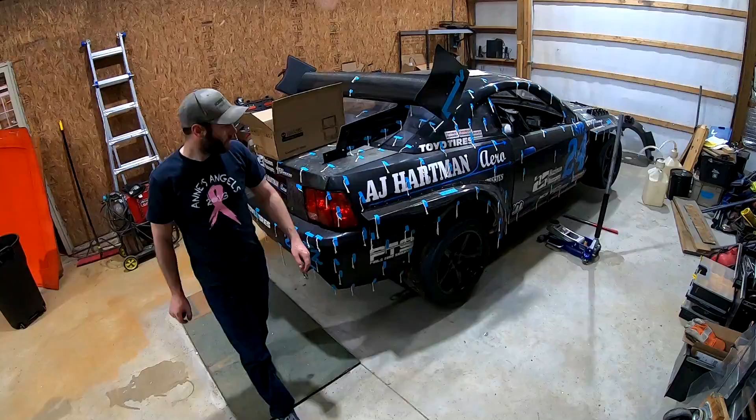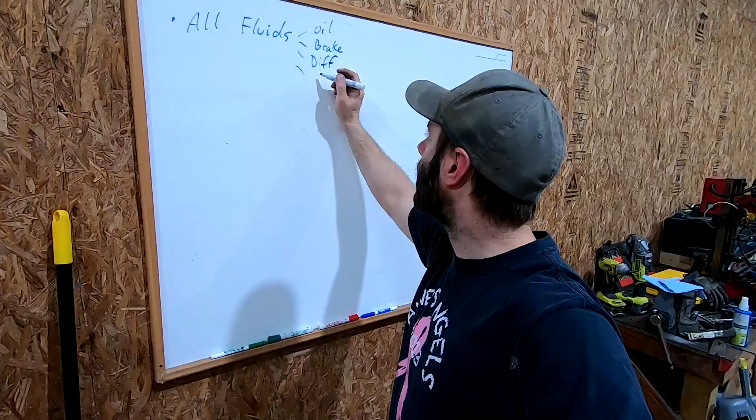Got the car up, got enough space around it to at least work. I found my Dremel, so that's a win at least tonight. I'm gonna make a list of stuff that comes to my mind. I know I have to do all of my fluids. So that would be oil, brake, definitely the diff. I'll put a link below to my last race last season when I broke the ear on my old diff. You can see the ear is here and it is missing on this side. So I got a cast iron diff in it now, picked up a little over 20 pounds from that. So diff fluid, and what am I missing? Trans fluid. I think that's about it. I think there's antifreeze in this, so I gotta do water.

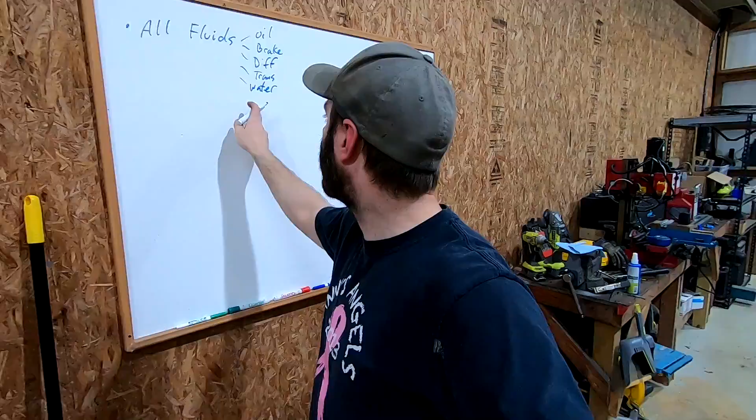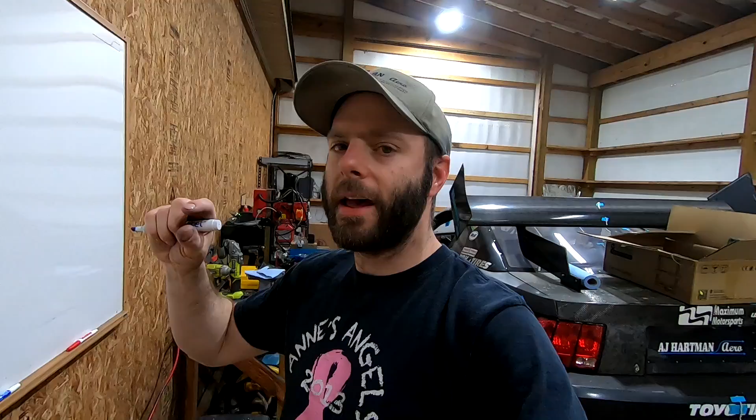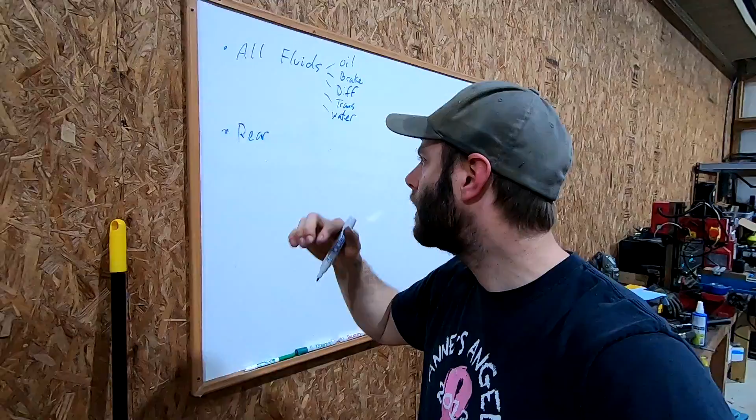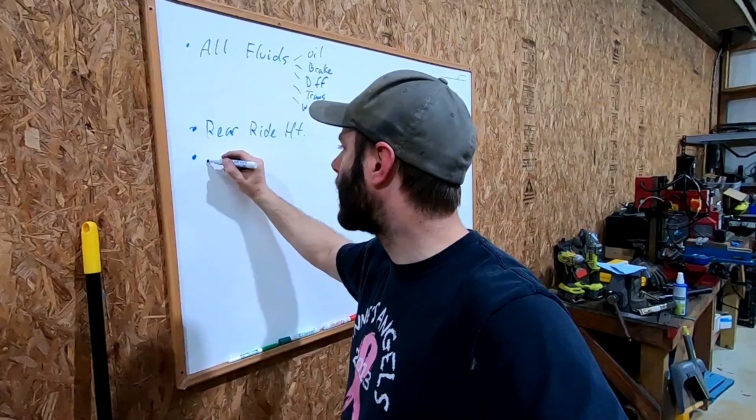One of the last videos I did was when we went to the wind tunnel, hence all the wool tufts all over it. In the wind tunnel, the rear tires sit on a pad that's, I believe, a 1/2 inch or a 1/4 inch. I gotta double check that, but I lowered the rear so when it's in the wind tunnel it's at proper ride height. So I'll do rear ride height. It's not worth corner balancing, but I will check alignment. That's another video I did, how I do my alignments with strings. I'll put a link to that below.

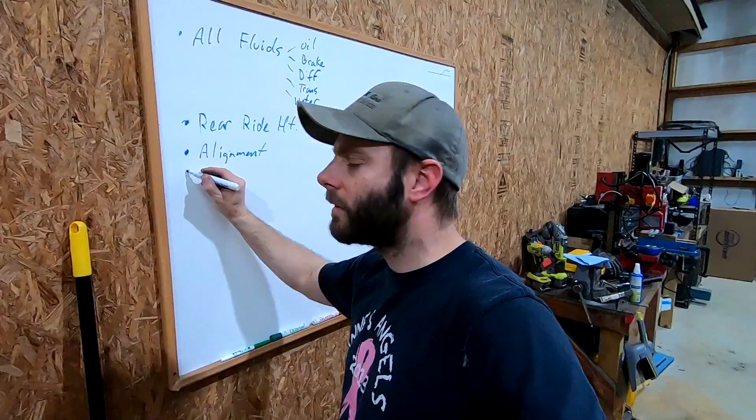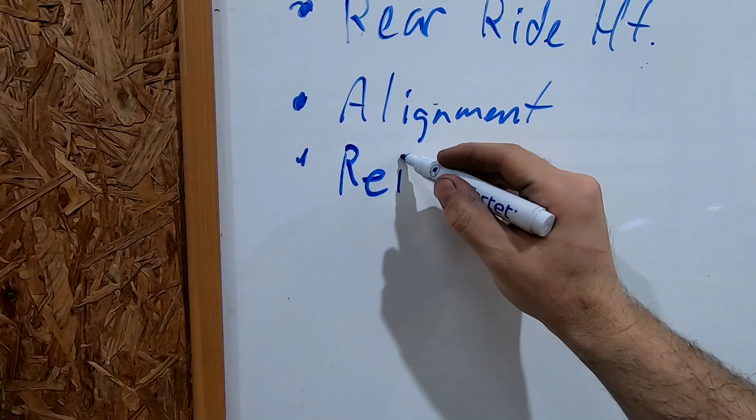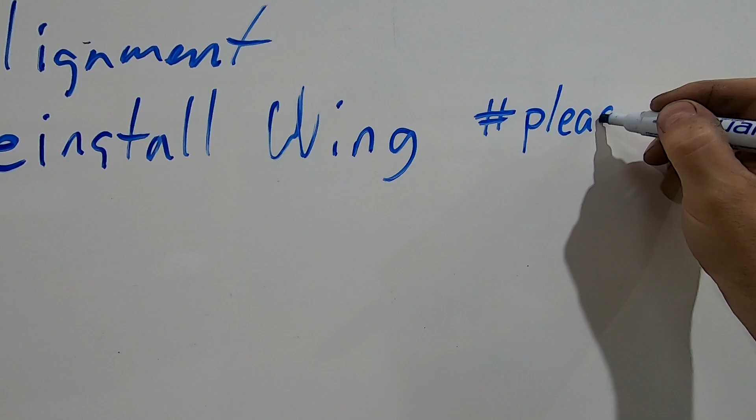What else do I gotta do? Oh, I gotta get the wing, well, I guess our Apex 8 is on it. Going back to the wind tunnel, the last time I did anything with this car, we were running all of our wings and some competitor wings across it. So I need to reinstall wing, hashtag please don't call it a wang.

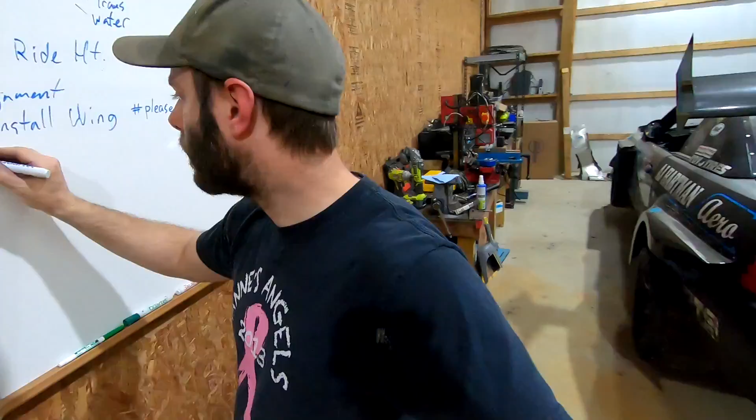Diff bushings. If you've been following me in this car, you know that I swapped an S550 rear subframe in the car, and the swap has been pretty good. I went into the reasons why I think that tab on the aluminum diff failed. I'm going to remove those, I think they're called diff lockout bushings. They just add a weird torque effect with the partial rubber bushing but locked out in the front. So for this weekend, I'll just remove them. I'm eventually going to turn down my own solid bushings on my mini lathe. So I got to remove those. Tech.

I think I'm not going to touch any front aero. I guess I got to put the duct back in again. That was out from the wind tunnel, tinkering around with stuff. So yeah, I think what I'm going to do is kind of jump into this, see what I come across.

Nut and bolt check. Might be worth, since I got 2 events on this rear subframe, the brackets that I made, just check any of my welds or anything like that. But yeah, let me keep poking around and double check, I guess, my dates. I should probably order stuff in case I need any bolts or anything.

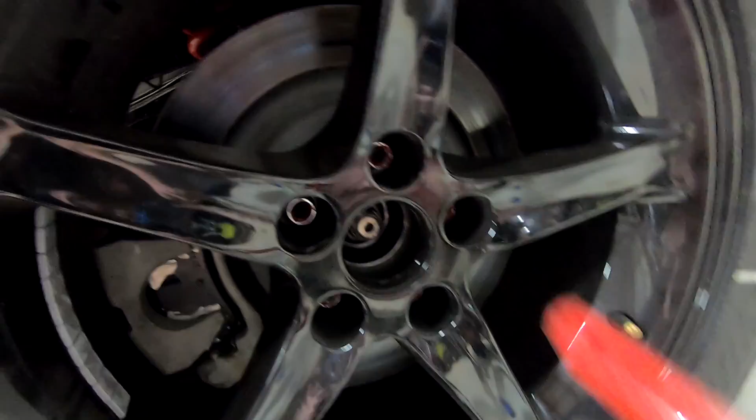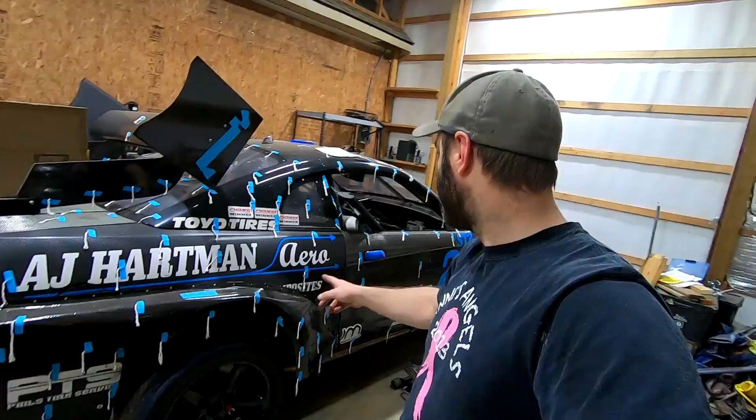All right, so something I did when I did this subframe swap is, if you see, I got 2 different color impact sockets. So the red is for the rear, and I painted the lug nuts red, so that way I know that one's for that. And blue, as you can see, I painted these ones blue, because I never swapped the studs. They're just a different thread pitch on the S550 than stock 99 Mustang stuff.

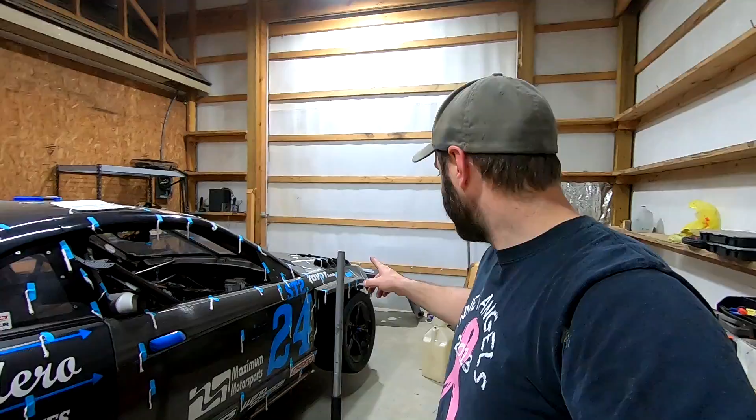Pulling those out of my toolbox, I actually kind of forgot about it. So I would have been sitting there using the wrong one, or even worse, you try and put the wrong lug nut on the wrong stud and end up cross threading it, and that would have been a big pain. So little tiny things like that could just help you out down the road.

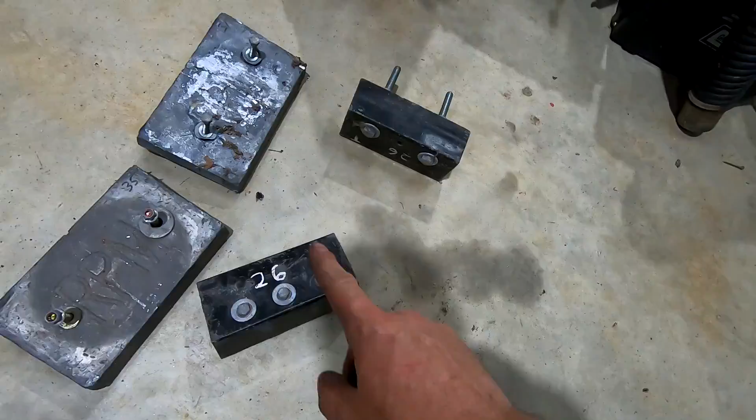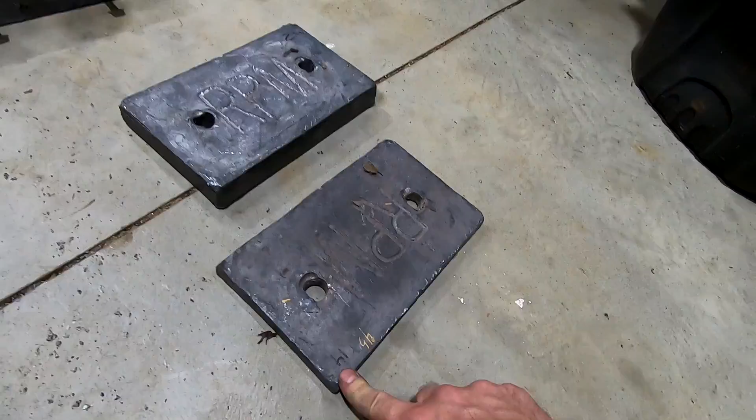All right, so I dug all of my ballast out, and let's see, we got a 26, 26, 31, 35, 30, I believe this is a 25, 22, where's this one? It's written somewhere. There it is, the heavy one. 37, 29, and a 14. So quick math, I think that's like 275 pounds. And to be a 10-to-1 at 330 horsepower, the car needs to be 3,300.

I'm right around 3,000. I was like 3,070 or 3,090 with the aluminum diff. Now that we got the cast iron diff, that's 295 pounds. So I might need to find like a brake rotor or two. And it also depends if the dyno reads a little bit high or low. I'm gonna be so borderline with ST3, but I'll be pretty close. If I'm over, I'm over. It'll be what it'll be. I'll take it all out and run ST2 against Ben. So it'd still be a fun weekend.

So yeah, now the issue is how do I get all this ballast into the car? And you know what, now that I'm thinking about it, I might want to double check the rules if there's a ballast limit. All right, let me keep plugging away and get back to that.

But to add to that ballast issue, if I had the flat floor, there's the pieces right there, which came off at Lime Rock. Well, my tire exploded and ripped one half off. I believe they were about 15 pounds each side. They're pretty big. So 30, and the diffuser maybe another 10 pounds. So I could put 40 pounds of aerodynamic parts on it.

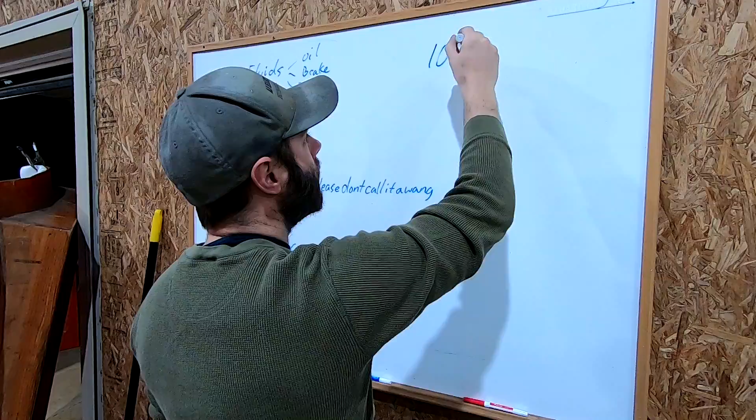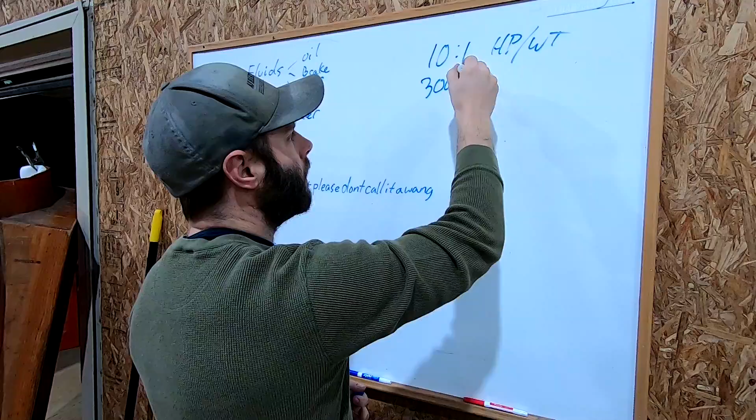All right, so looked into it a little bit more, and to try and make all this make sense, hop in front of the whiteboard. ST3 has a 10-to-1 horsepower to weight ratio. Right now my car post race is right around that 3,000 pound mark. So I'm allowed to have 300 horsepower.

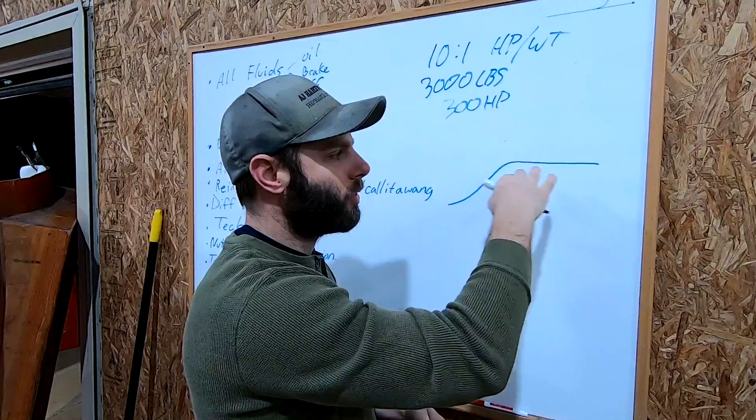That's also across an average of RPMs, so I could peak a little bit more than that, but this car having my old American Iron tune on it, it has a flat tune. So a flat tune is like as your horsepower comes up and hits whatever ratio you're allowed to make, the car is tuned to then just make that horsepower for as long as it can. So that's a flat tune.

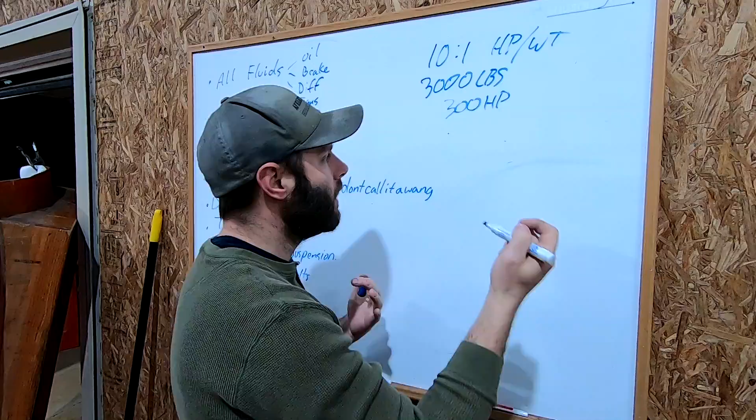But right now my car makes, this is where it gets a little funny. The dyno at the first race of 2019 — I didn't get dynoed in 2020 because I used my '19 dyno, I never tuned this car, I don't have the ability to — was 321 horsepower.

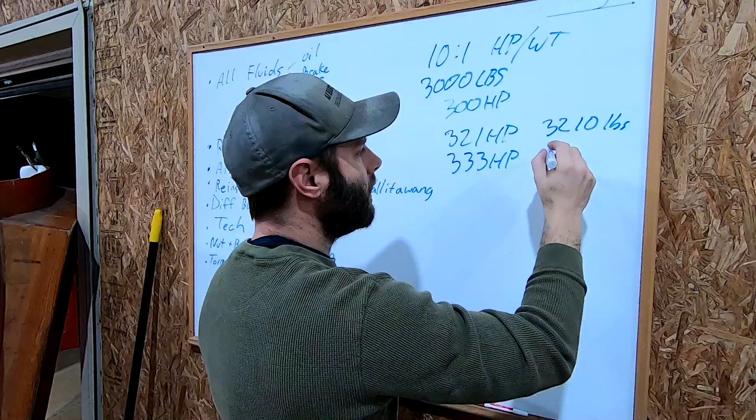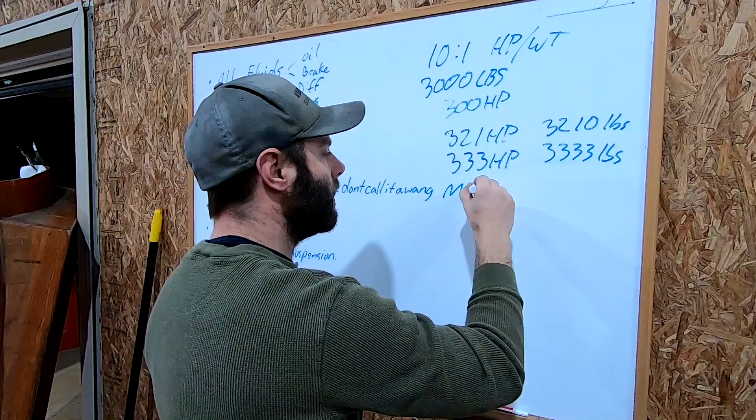The dyno at Nationals at the end of 2019 was 333 horsepower, I think. So at a 10-to-1 ratio, my car needs to weigh anywhere from 3,210 pounds to 3,333 pounds, if we're exact on the pound. The rules state we're only allowed a max of 250 pounds.

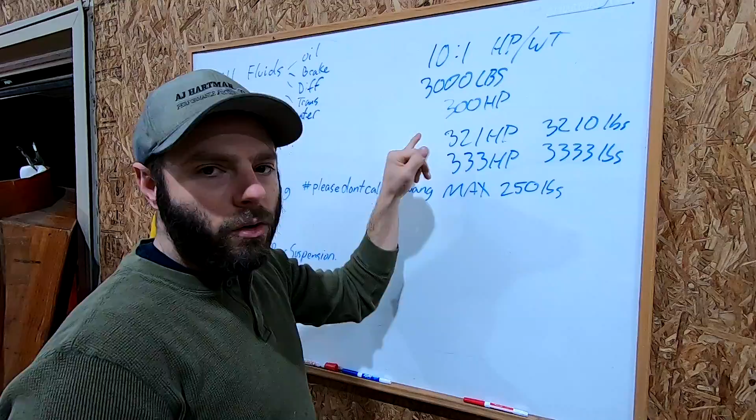Now, ballast is defined as only adding weight and having no secondary purpose. So yeah, I could install my floor and my diffuser like I mentioned earlier, or put stock doors back on the car or something, but I'm not really excited about that option.

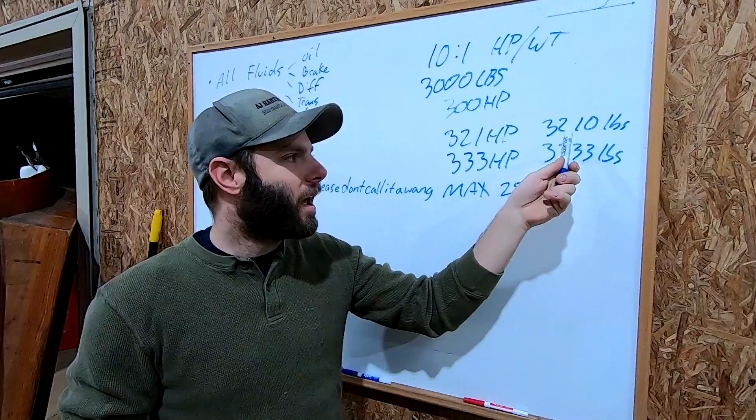So if the dyno reads low and I bolt almost all of the lead I have, I would kind of be legal for ST3, but I literally have like a 30 or 40 pound window if the dyno reads low. If the dyno reads high at all, I'm kind of not legal for ST3.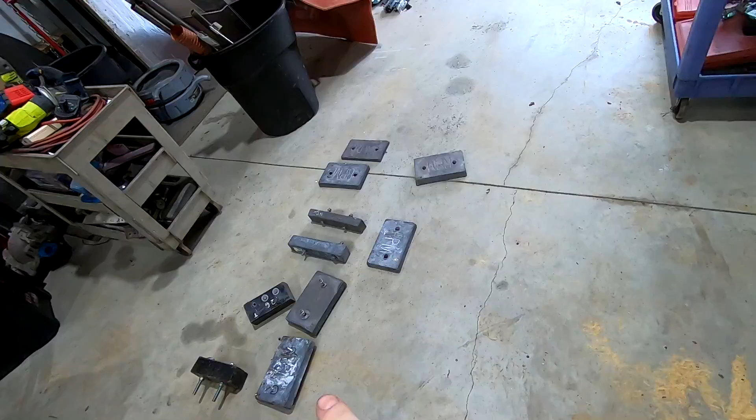Plus, let's take a look at it. I don't know if I pointed this out earlier. You can see all these bricks of lead. So to safely bolt all this lead to the car, plus the time it takes, I don't think it's worth it. So pretty much ST2 it is for me.

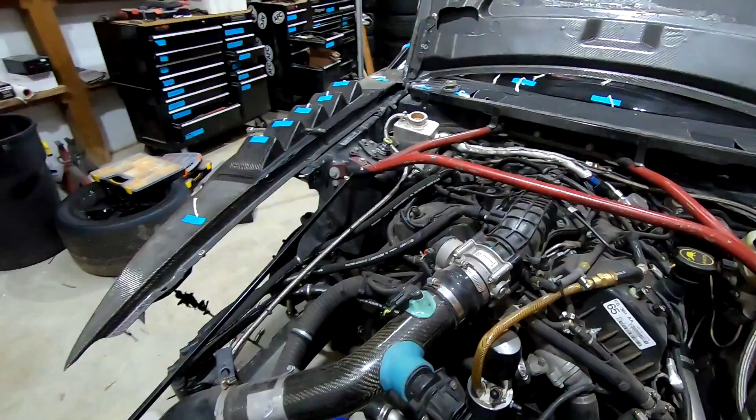So I can actually look at trying to remove some weight, maybe get a tune, increase power. Another thing I thought about was making a restrictor plate. Making something out of aluminum that goes between the intake manifold and the throttle body with a slightly smaller opening would just kind of kill power a little bit.

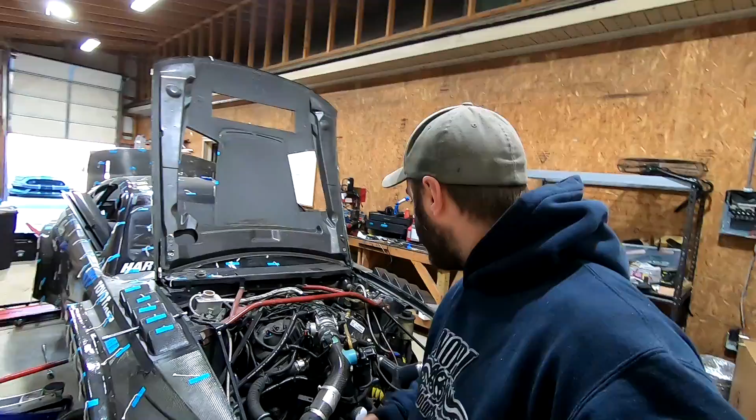Again, I'm not excited about that idea either, but I would do that rather than ballast because weight affects a car during turning and braking, where if you detune it, even though it's the same horsepower to weight ratio, a lighter car will be able to brake faster and turn sharper than a heavier car with more power.

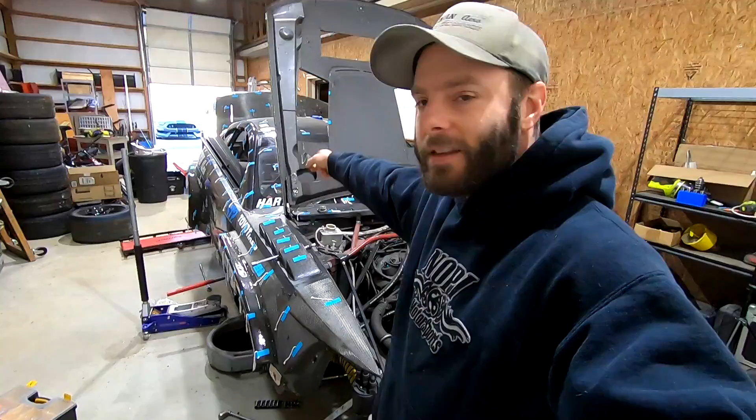So that would be option A. Option B would be, well, I guess option B is that. Option C is add all that ballast. Option A right now, just get this thing raceable, because I'm in a little bit of a time crunch, and maybe figure this out later.

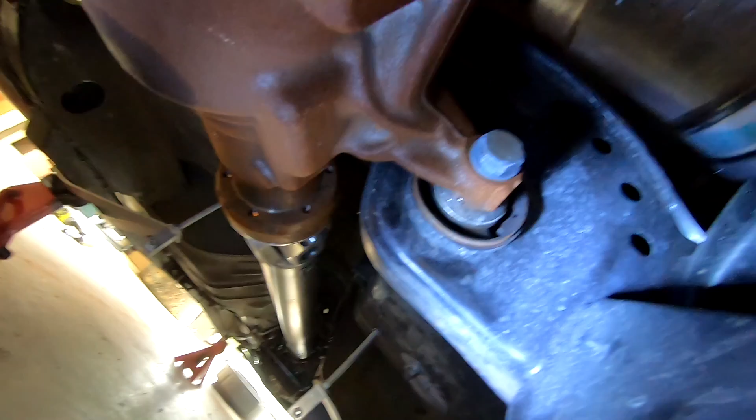All right, so while we're under the car, we are going to remove these differential lockout bushings. They're also in the front. Let's get a little light in here. So the front one, we're looking at it towards the front of the car. You can see how there's no bushing, it's just the factory rubber. But then if we swing to the other side, you can see how there's the lockout bushing.

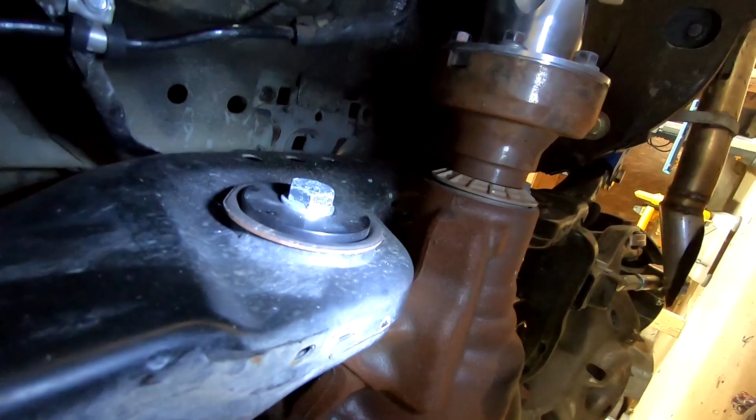And the issue, I'm pretty sure, with the bushing being locked out here but rubber here, the weight of this moving introduced a leverage or a torque, and that's why the ear broke right about here on the aluminum diff. I'm not going to risk it, even though this one is cast iron. I'm just going to remove them until I can do solid bushings all the way up to the diff.

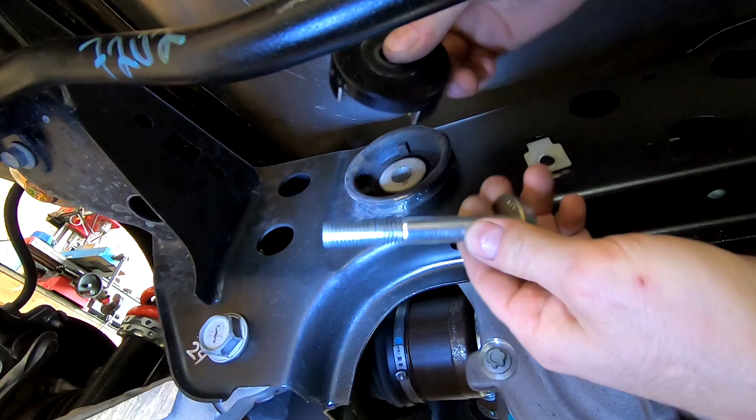Alright, so now that the lockout bushing is out, you can see how much thickness is here. So this bolt is longer than the factory bolt, but since I just moved shops, I have no idea where the original hardware is. You can see that's where the thread engages. It's long enough where what it threads into is probably going to bottom out on this shoulder here. So we need some sort of spacer.

Unfortunately, whatever this is, like an M14, I believe, I don't have enough spacers around to take up this. It's probably almost like a ½ inch. You could just stack some spacers and you'd probably be fine. But I do have this little bit of aluminum shim. So what I'm going to do is drill it out big enough, and on my mini lathe just part it in half, and then there's my 2 spacers.

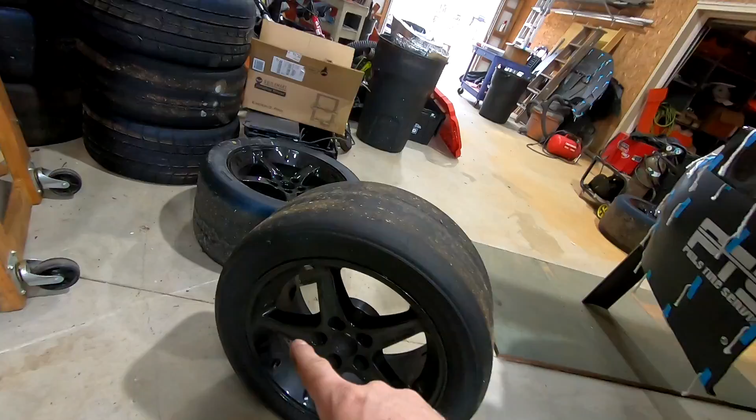Alright guys, so I'm knocking stuff out. Just got done putting water in it. Don't worry, that's just a spill, not a leak. And I think I finally figured out what I want to do with this whole ST2, ST3 situation. And the answer is run my Toyos. So there are 275 versus, oh crap, forgot the lug nuts were in it. So you can see the size difference. And then obviously a Hoosier is a much stickier tire than a Toyo.

But the way that the rules are written, you get a 0.3 modifier for a 267 up to a 283 millimeter tire, or 285 or something like that. So those are 275s. Then you get a 0.6 modifier for running a Toyo for a total of 0.9. That 0.9 at a 3,000 pound race weight allows me to have 330 horsepower. So I think I'm just going to run the Toyos. I think that's kind of like the easiest compromise. Might have to add only one brick of lead as opposed to all of them.

And what was the other thing? Oh, and then the restrictor plate, talking to somebody who's much more knowledgeable than me with these engines and tuning them and everything. These new engines, I don't think they're like old engines where you can just throw a restrictor plate in and the power comes down. It'll kind of try and self-learn itself around it a little bit, and that might just be a host of issues that I don't want to get into either without taking it to a dyno to get a proper tune. So yeah, I feel like this is the third or fourth time I changed my mind on what I want to do. But yeah, I think Toyos are the answer for this one, or at least this weekend.

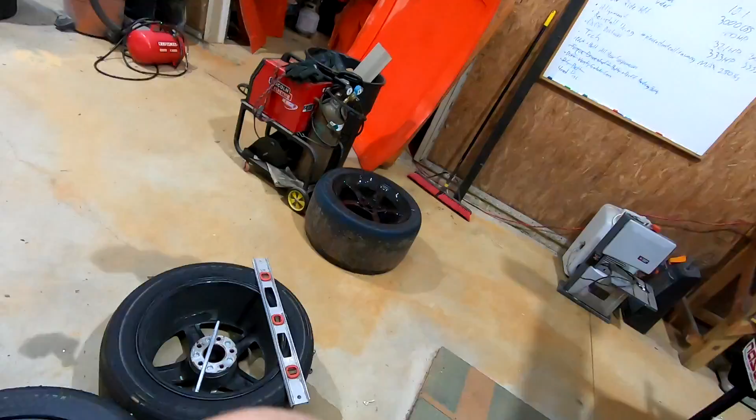Alright guys, so what I need to do now is figure out the back spacing difference. And I remember doing this not too long ago, because when I built these flares to make everything line up, I'll put a tag of that video up here. So we have a straight edge. I have these 1-inch hub spacers.

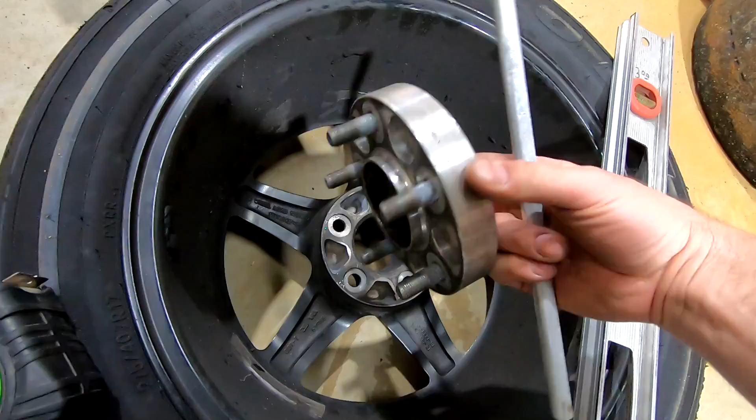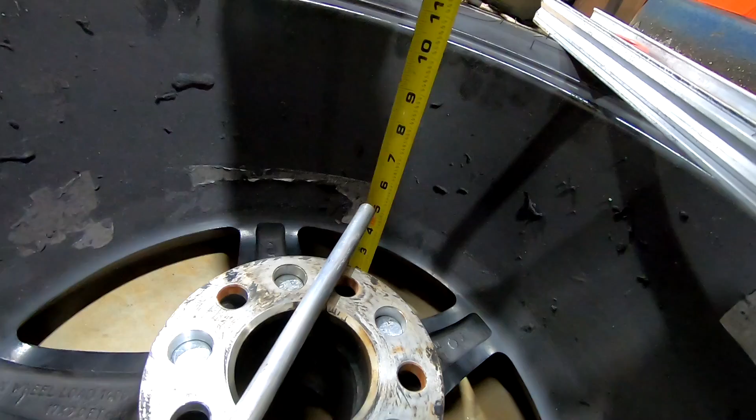So we got a little straight edge right here. And the camera might make this look a little funny, but it's looking like 6 7/8 at the top of the bar. And then come over to this wheel. And we're going this direction because I kind of want it lined up on the outside of the car. And is that like 6 5/8? 5/8, 7/8. So that's actually not too bad. So it's about a 1/4 inch difference,

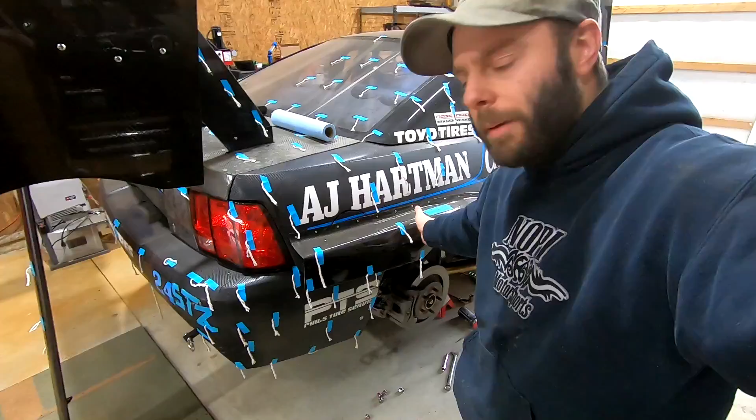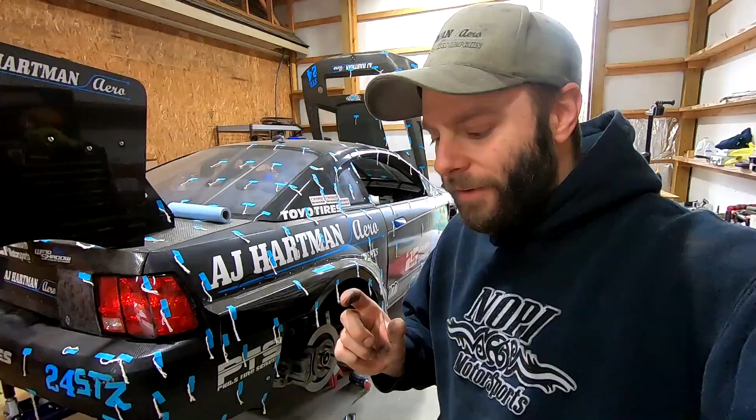which is actually pretty cool, because when I built these flares, I made them a little bit bigger just in case, because those are 315s on a 10.5 inch rim, in case I ever went to an 11-inch rim to fit 335s under this. So I'm going to go ahead and bolt that up with that 1-inch spacer on the old 275 tire, and we actually should be pretty good. All right, I'll knock that out and see what we end up with.

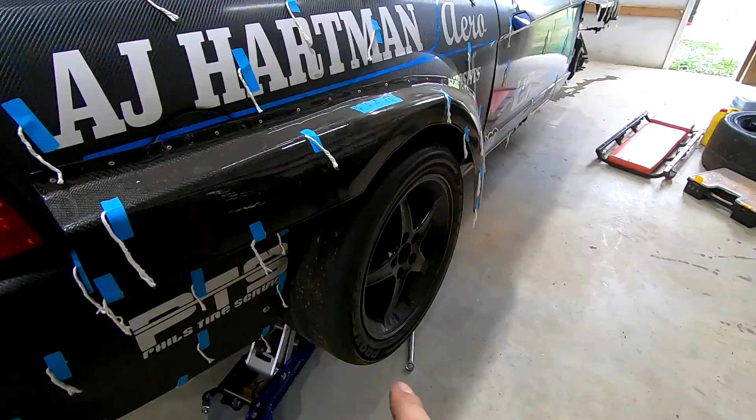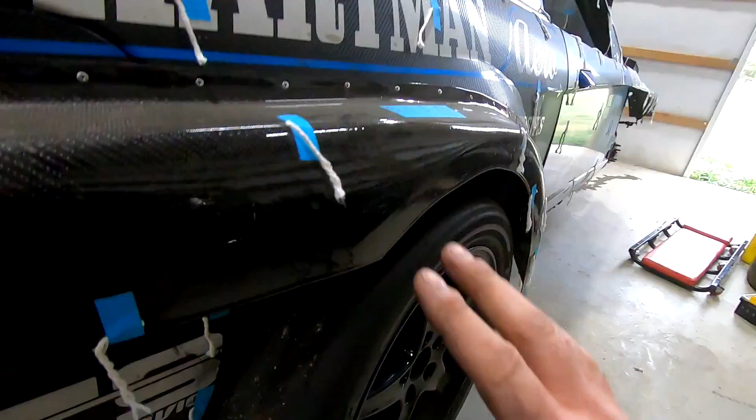All right, here it is, bolted up. You can see if we come around the side, I think we got plenty of room. Once this goes up, the camber curve will kind of carry it in a little bit too, so I think we're good. So yeah, looks good. Toyo for the win.

All right guys, so I got the Toyos on, and I think that's about where I'm going to wrap this one up. I still got a few other odds and ends to do, like the hood pins are still missing. That's left over from when we went to the wind tunnel. And I got to get the ductwork back in, but I'm talking minor stuff. I'm going to get it on the ground, double check the alignment. I'm not going to show that. I did a video on that previously. I'll put a tag up here to my alignment video. But yeah, I think that's about it for this one. Hopefully you learned something.